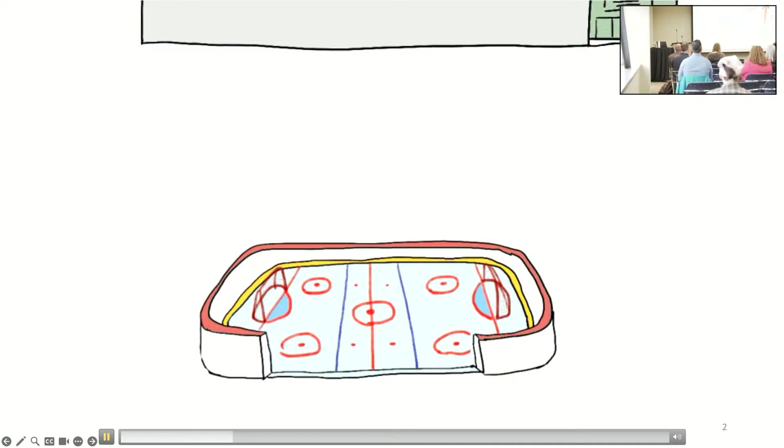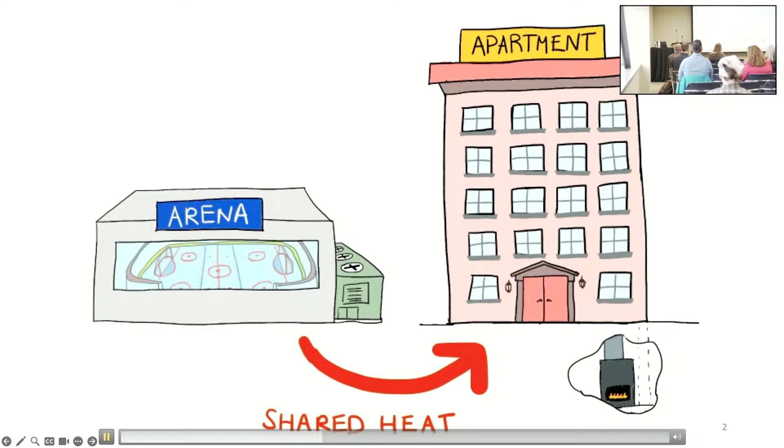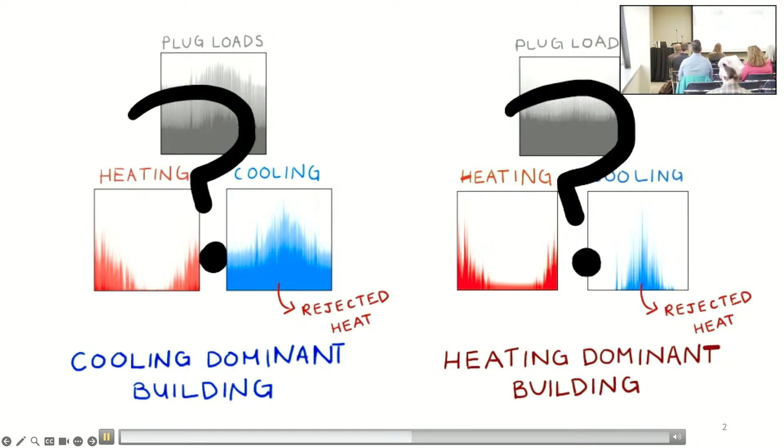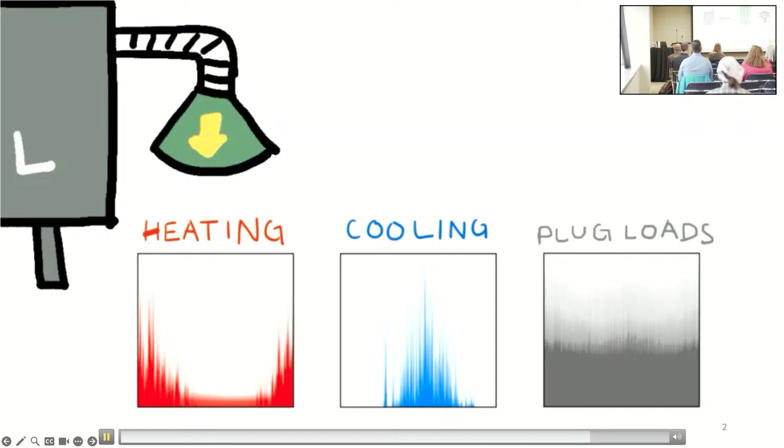Buildings contribute to a significant amount of Canada's greenhouse gas emissions. This comes from the energy used to power appliances and lights, cool buildings in the summer, and heat them in the winter. Some buildings with high cooling loads will reject heat to the surroundings throughout the entire year. What if this rejected heat could instead be shared with a building that needs it, reducing the total amount of fuel consumed? This can be accomplished using a thermal energy network. In order to design these networks, we have to know how much energy is required and rejected by each building. This is the focus of my research. My name is Stacy and my work uses measured utility data to train a predictive building energy model. I look at how different factors like weather impact energy demand and use them to predict the thermal and baseload profiles for each building. This helps to control the system to distribute energy efficiently while minimizing carbon emissions.

So I don't know how I have to do anything after this. Stacy basically defined the problem: we have carbon in our buildings. She won the GradFlix Award for this contribution, and she didn't even explain what she was talking about whatsoever. She didn't use the big words.

If you look at where our energy comes from for our buildings, okay, we have our appliances, we have our lights, we have our space cooling, and then we have all this orange stuff. That's how we heat our homes and our hot water. And then if we come back, okay, this is about greenhouse gas emissions and carbon emissions savings. Where does the carbon come from? How we heat our homes. And about 6% in this province comes from our electrical grid, thanks to our very green electrical grid: nuclear, hydroelectric, and a lot of wind.

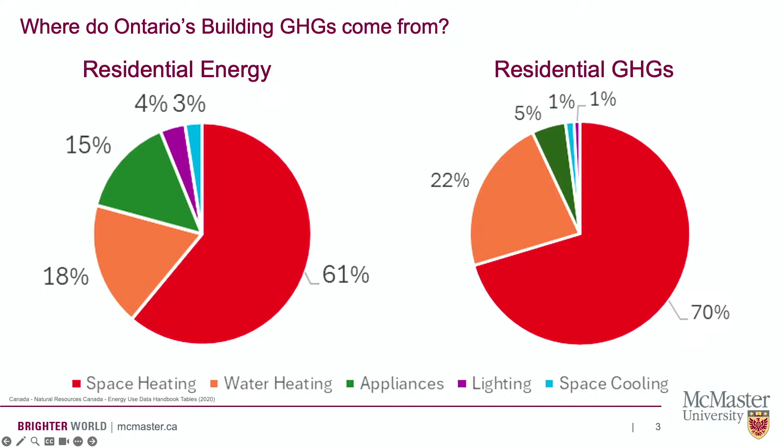So what should we focus our efforts on? Heating, right? So where does our heat come from? How do we heat our homes? Well, most of our homes are heated by natural gas. Most of you, probably almost all of you, have a natural gas furnace. Maybe some of you have a heat pump, right? We have about, what, 3%? It's growing. And if you're in a northern community, you're probably on fuel, diesel fuel, propane, or even wood.

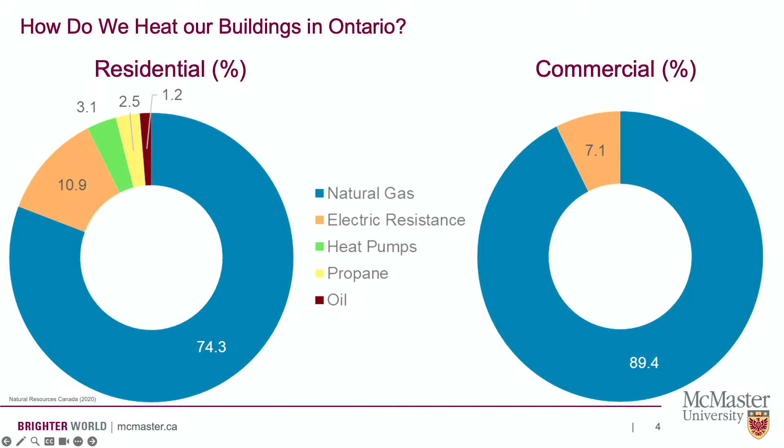Commercial, it's almost all, 90% is gas. So we have to tackle this problem. This is a huge problem. Why is it a huge problem? Well, guess what? We live in a cold climate. This is Toronto. Here's Edmonton, it's a little bit colder. We're on par with Sweden.

So this is indicative of how much energy we need to heat our building. This is indicative of how much energy we need to cool our building right here. The difference is tenfold. We have a problem, and it's tenfold what our cooling problem is. And if you know anything about our electricity grid, our peak right now is because of cooling. Could you imagine tenfold on top of that to do the heating side?

And it's worse than that, because when we're cooling, we're only trying to take heat out of our building between a 12-degree temperature difference. Say it's 35 degrees Celsius outside, you warm up your house, or you cool down your house to 23, you increase your set point a little bit because you're a good citizen.

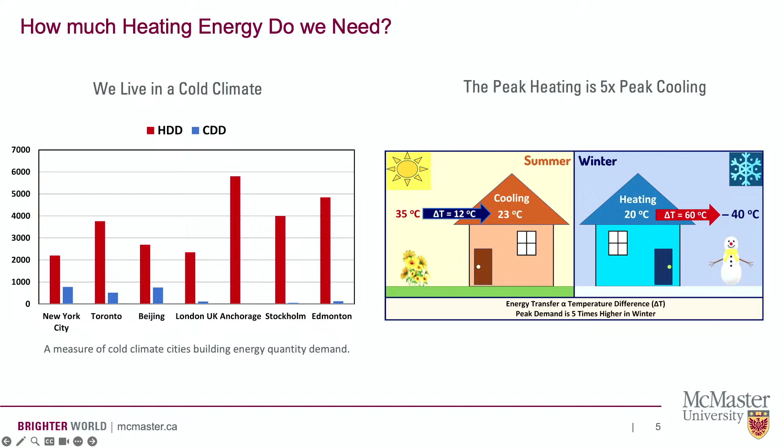But in the wintertime, when it's between minus 30 and minus 40, you still want 20, so you set it back a little bit. Now the temperature difference is 60, that's 5 times. So that peak energy demand is 5 times higher. It's a significant challenge.

So I'm going to talk about stuff. I presented this to my sustainable energy course yesterday and to my thermodynamics 101 course, and asked for their feedback. It was the last class, so I thought, let's have some fun. And they said, well, you better explain what a joule is, because when I came in here, I didn't know what a joule was.

So a joule is a measure of energy. So is a kilowatt hour, and watts are power. They're different. And then you get into prefixes.

So kilowatt hours is what you see on your electricity bill. You're probably between 500 and 1,000. Well, a pizza oven uses about 300 a day, just to give you context, enough to heat 6 homes. McMaster uses 10 megawatts of power at peak, typically. The scale of our entire electricity grid at peak, say September 1st last year, was 23 gigawatts, 10 to the 9.

We get into terawatts when we're talking about how we heat this city. And this city is a little bit bigger, probably more than 1 terawatt, probably 4 or 5 terawatts. And then we're getting into 10 to the 15, so petajoules, when we talk about the province. So I'm going to use all these words, and I'll use thermal energy and electrical energy because they're a little bit different.

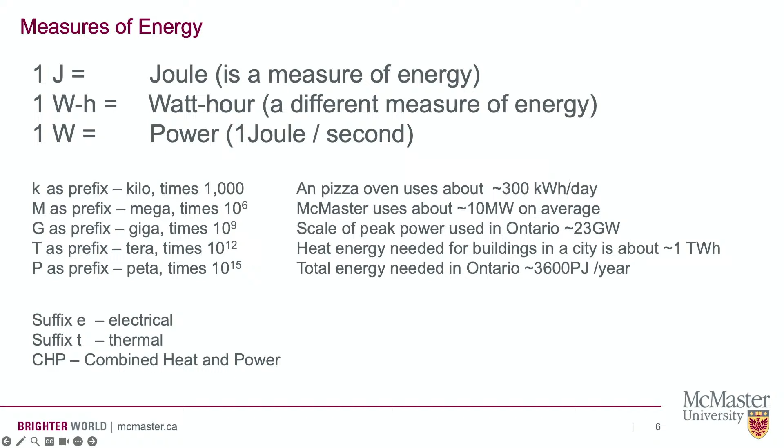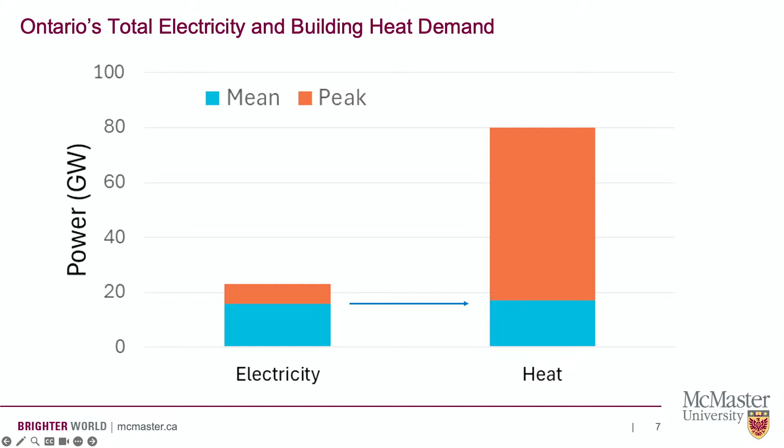So how do we deal with that? Well, our electrical grid's very clean, we should electrify that, right? We can do that with baseboard heaters like they do in Quebec. If you've ever been to Quebec, very uncomfortable. Let's not do that, that's bad.

We'll use heat pumps instead. What is a heat pump? A heat pump is an electrical device, exactly the same as your refrigerator, that takes heat from a cold space and puts it into a warm space. So it takes it from outside and warms your house, or takes it from the ground and warms your house. You can even take it from things like sewers or wastewater and use that heat to heat your house.

The efficiency is what's really good about it. If you look at an air source heat pump, it's about 200% efficient - that's not quite the right word, but I'll use it for now - 200% efficient on average, seasonal average. That means I need half a kilowatt of electricity, and I get half a kilowatt from the air, and it delivers 1 kilowatt of thermal energy to my house. If I used the ground, it would be higher. And if I used heat recovery heat pumps, it would be even higher - we're talking 800%.

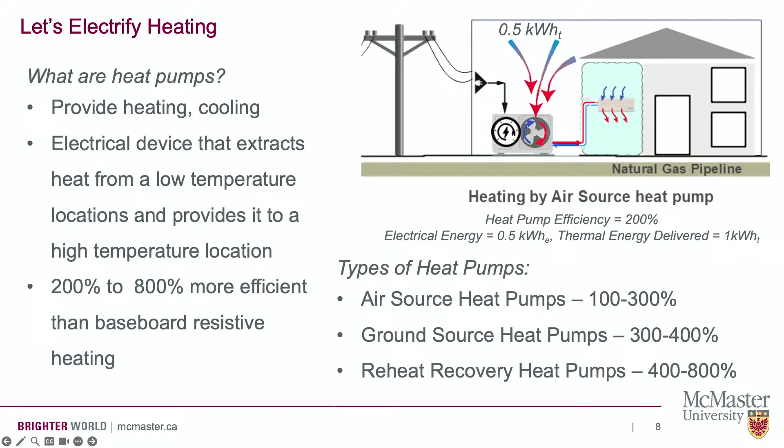So we have this technology at our disposal that we can use to electrify heating. Now, that means we have to look at where our electricity comes from. So here is our nuclear fleet - we have CANDU. 50% of our electricity comes from our nuclear fleet, and we are doubling that right now. That is already planned.

Hydroelectric - Sir Adam Beck, thank you very much. The green stuff is wind, which we have about 5 gigawatts, that's a lot of wind energy. And then the remainder, the blue stuff - oh, there is some sun, but I'll talk about sun in a second. There is some sun, not very much, most of it is at the distribution level, so there's about 2 gigawatts of sun. But this energy here is called the marginal energy - that's our gas. So when we don't have enough, we use gas.

Now, here's something interesting. I like this because I picked this up on the 9th, the day after the eclipse. I was out there on top of Hatch watching the eclipse, it was fantastic, and I got that picture right there myself, so I'm very proud of that. And then I went, okay, what happened to the electrical grid? Because I'm such a nerd. And that's what happened - see right there? That's the eclipse. So we have all of this solar energy that's behind the meter, that people have on their homes, that sort of offsets their demand, and it all went away.

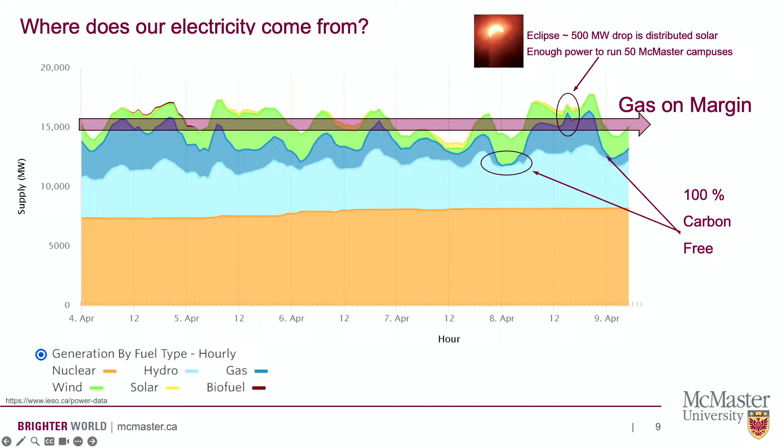Wind stops blowing. The problem is right now we are at a time where we are refurbishing our nuclear fleet, so our nuclear fleet is a little bit lower than it is, and we're refurbishing more. So more and more gas is going on the grid, and right now, most of the time, 60% of the time, gas is on the grid.

And I showed you, it's even higher. So I think their predictions are off. It was almost only 5 hours of a week that gas was not on the grid.

So if you think about where does your next joule come from? Well, guess what? It comes from gas. Your next joule comes from gas. That's a problem, and it's only getting worse.

And this is from the IESO. It's because it takes a long time to build a nuclear power plant. That's our main strategy right now to decarbonize. It's because we have to fix a lot of nuclear power plants, or refurbish them — not really fixing, they're extending their life. And in the meantime, our government has decided to rely on our gas fleet.

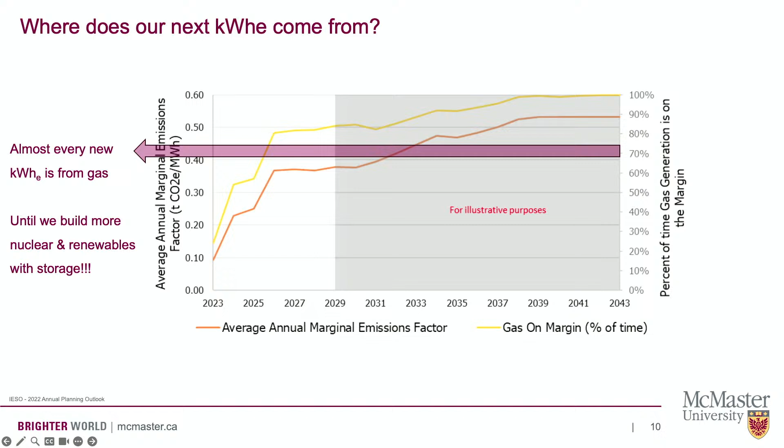So what does that mean? Well right now, most of our homes — 74.5% — are heated by natural gas. I'll be nice and say they're 90% efficient. That means for my 1 kilowatt hour of heat, I need 1.1 kilowatt hours of natural gas.

And I generate 204 grams of carbon. Now, I decide tomorrow I'm going to switch to an air source heat pump. And when I switch to my air source heat pump, I have 200% efficiency, but because I'm switching now in this environment, I have a challenge.

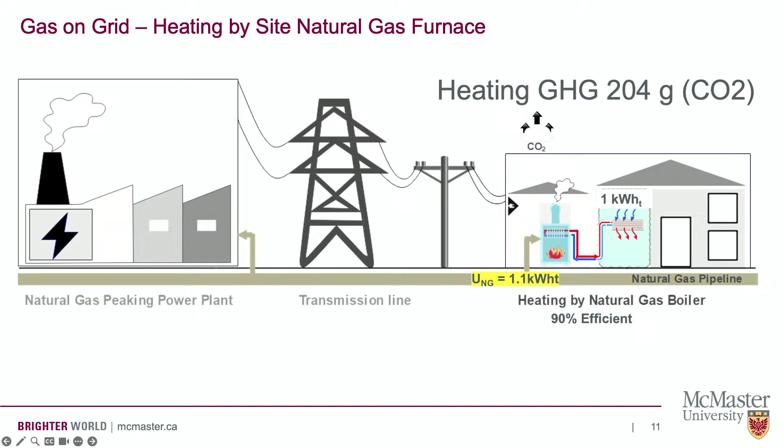I'm getting it from a gas plant, right? Because I said the next joule is from a gas plant, and my gas plants are 42% efficient. I'm not going to get into it — that's thermal 101. That means 42% goes to electricity and 58% goes up the chimney. I like that number because I'm going to try to capture it later on, but only 42%.

Then we're a big country and a lot of it is all over the place, and no one wants a nuclear power or gas power plant near them, so it's far away. So we have a lot of line losses — 10% if you include distribution. So in order to heat my building and get that 1 kilowatt hour of heat, I need half a kilowatt of electricity.

With all of these losses, I need 1.3 kilowatts of gas, and my carbon emissions went up 17%.

Okay, the good thing is I'm using this as an example. We need 240% efficient heat pumps, so buy the good one. 300% — that balances us, brings us to the other side. So we really have to figure out and make sure if we're selling heat pumps, we're selling the good ones.

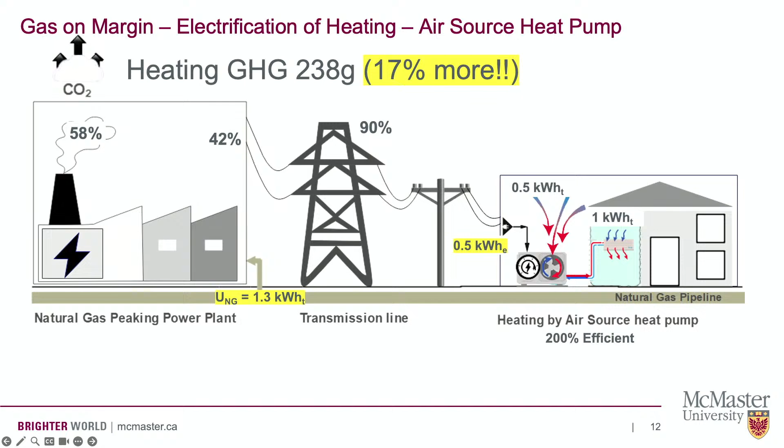That's not really the problem. We still have to electrify. We have to electrify, okay.

That's the challenge. How do we deal with that challenge? Come on in, guys. No, come on in. That's okay, they're all my guys.

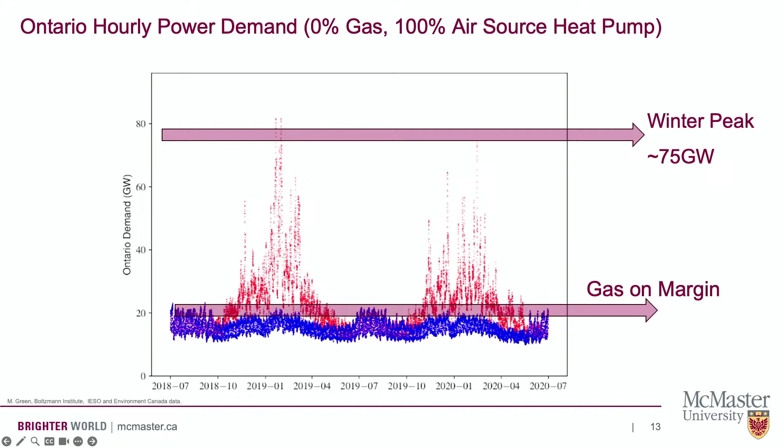So let's go a little bit narrower. I've been involved with Lynn for, I don't know, a long time.

This was work done before the other project. I still love this presentation because this is Burlington, my hometown. I'm on the community energy plan, now climate action plan. And we had this fortune to visit Sweden, and we saw how they were doing it sustainably.

We came back and some people asked me, can you see what would happen if we followed Sweden's approach and electrified everything? So we said, okay, sure. All my students spent three weeks, dropped everything, all their research, and said, let's do it.

We got the data for electricity, transportation fuel, and natural gas. What we found is 26% is electricity, 29% is transportation, and 44% of the energy is from natural gas to heat our homes.

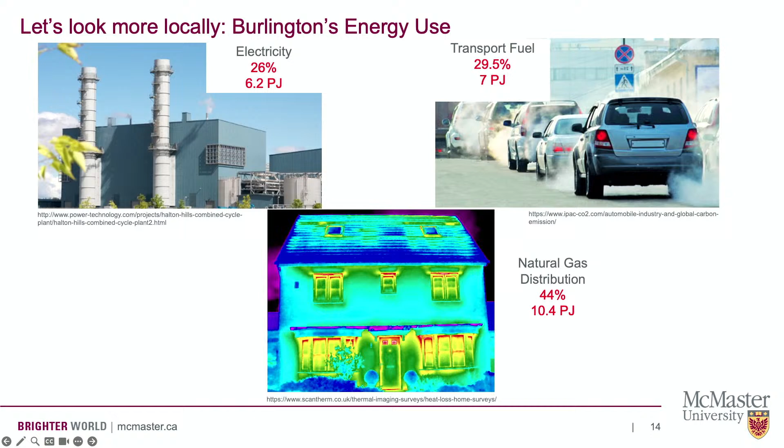That's interesting, but the carbon was more interesting. 50% of carbon comes from heating our homes. So what should we be tackling? What should we really focus our research efforts on?

Of course, our efforts at McMaster on electrification of vehicles, Dr. Ali Emadi and Dr. Habibi and the entire team there, that's brilliant. It has to happen. They're 10 years ahead of where we need to be on the heating systems. So it's a big challenge.

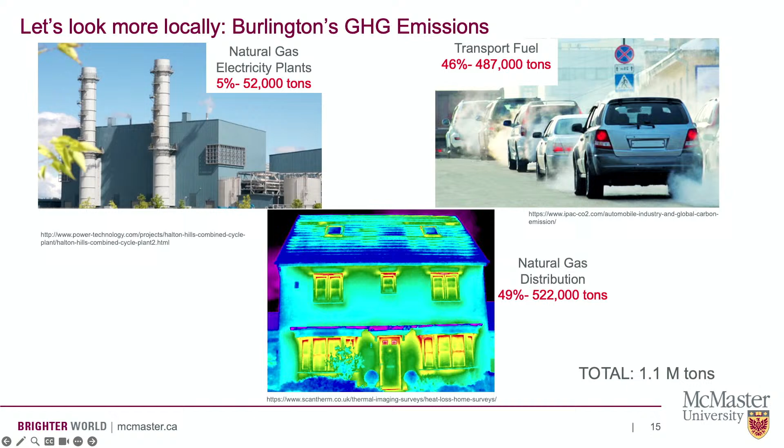If we look at what happens when we electrify things, looking at totals in petajoules, which is how much we use in a whole year, and this is just changing it tomorrow with a magic wand, all electricity - electric vehicles are way more efficient, going from 7 to 2.6, and air source heat pumps go down from 10 to 4.2.

That's great, so we've made a bunch of efficiency improvements. That does increase our electricity delivery by Burlington Hydro by 2-fold.

Now I'm not doing this instantaneously. We'd do this over a 25-year period. In 25 years, the population is going to grow by 50%, so that's a 3-fold increase in electricity that we're going to deliver.

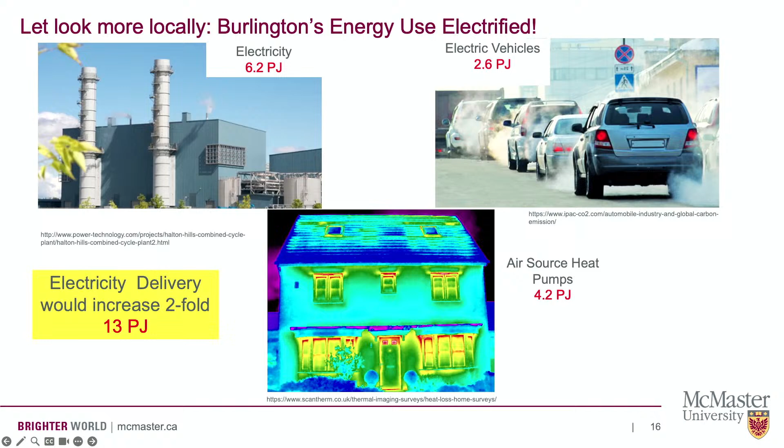And that's for everybody. It took us 150 years to get to here with our nuclear, hydroelectric, wind, and gas. Now we have to go 3 times that - 3 times more nuclear power plants, 3 times more Niagara Falls, which are hard to find, 3 times more wind, 3 times more solar. This is a big problem, a grand challenge.

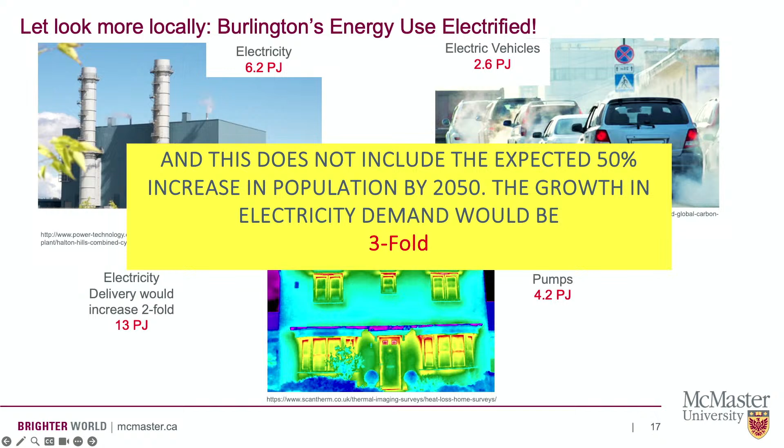Of course you've got to look at everything. I'm not going to get into conservation in depth, but we did look at it. This chart is someone else's - it just looks cooler than ours.

If you look at it, you start with the cheapest and go forward. These are called deep retrofits: insulation, changing to the best appliances, making sure there's no leaks, and getting rid of old, crappy appliances and heating systems.

We need to do that over 25 years. That'll happen - we should be doing a little bit more than that, but this is what we need to do.

So when we looked at the best-in-class transition from where we are today to where we could be, based on all the technology we could dig up in our research, and best-in-class conservation, this is what happened - it went up.

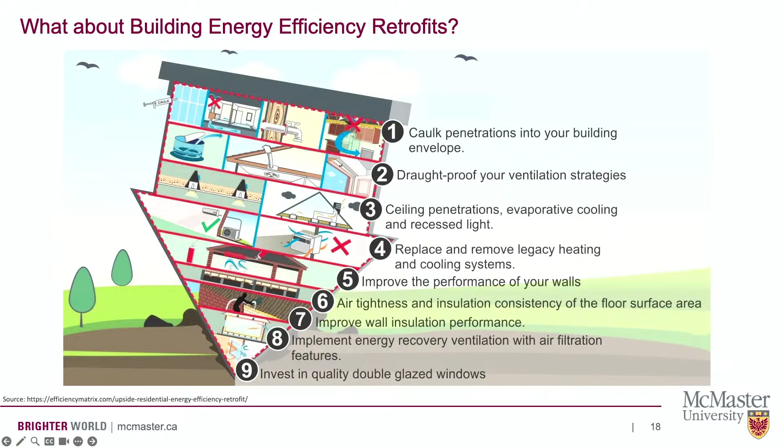That population growth is a problem. So it only went up 9%, and greenhouse gas emissions only went... so we have to do something other than conserve.

We have to start thinking about fuel switching. We have to get off gas, get onto electric, or switch to electric vehicles. We have to figure out how to do that.

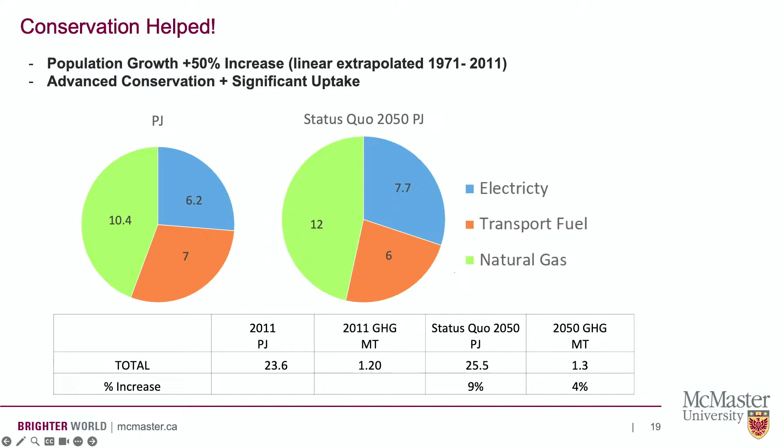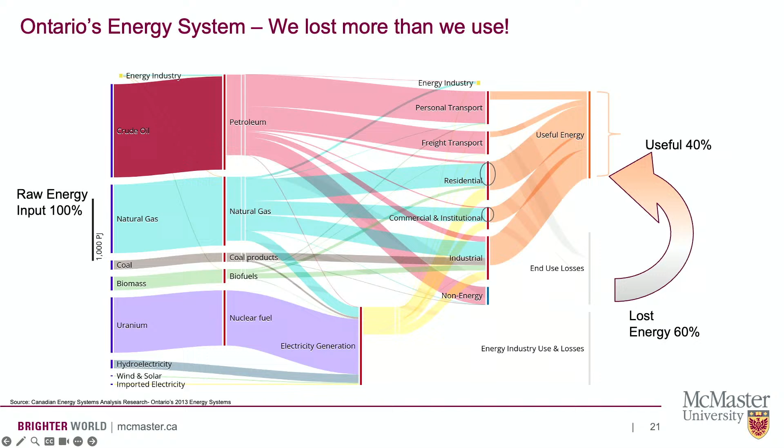What if we monetize that value? Like Stacy talked about, if you had an arena, they'd have a revenue stream for heating the pool next door, right? That's what has to happen.

So if we look at this, if we take climate action, we really think about what we need to do. If you include industry, our building sector is only 24%, but that's a lot of our carbon emissions. We dump 60%, and we put so much renewables online without proper storage that we actually curtail.

Curtail means we spill more water over Niagara Falls. We stop the turbine blades from spinning. We unplug the solar panels, and we even bypass heat around our nuclear fleet and dump that heat directly into our lakes.

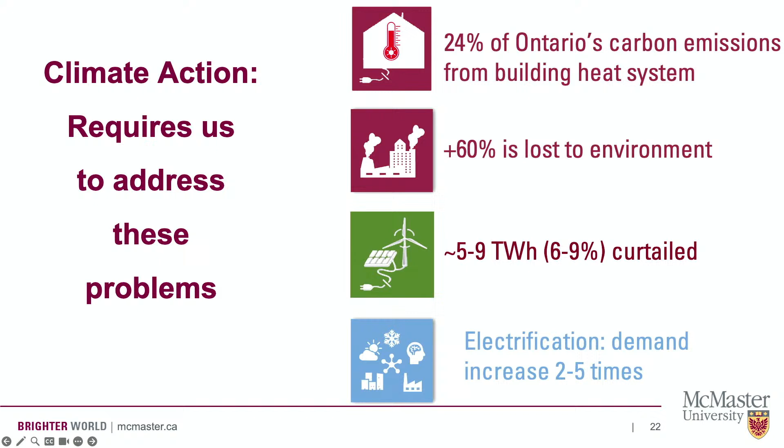That's 6 to 9% of all the energy we use that's not harnessed. And as we electrify, we're looking at 2 to 5 times more demand, depending on how we do it. We're planning for 2, but in reality it's going to be more.

So how do we deal with this? What's the solution? Well, thermal networks—I'm going to get into this. That was actually the title of my presentation before we changed it, so now I know what I'm talking about.

Then harvesting and sharing energy. No one shares, but we live in a shared economy, right? If you use Uber or Airbnb—so the word is nice.

You still make money. And then we need distributed energy resources. We need resources in our community—combined heat and power systems, more solar collectors, way more solar collectors in our communities. We need to create demands.

Guess what I can do with a heat pump? Create a demand. And we need to integrate our networks. That diagram, that spaghetti, is called a Sankey diagram—they're all independent streams. You go to the gas station and buy gas, you pay Enbridge for natural gas to heat your home, and you get electricity from your utility. What if we had an integrated supplier of energy that optimized all three?

That's the future. So how much do we have?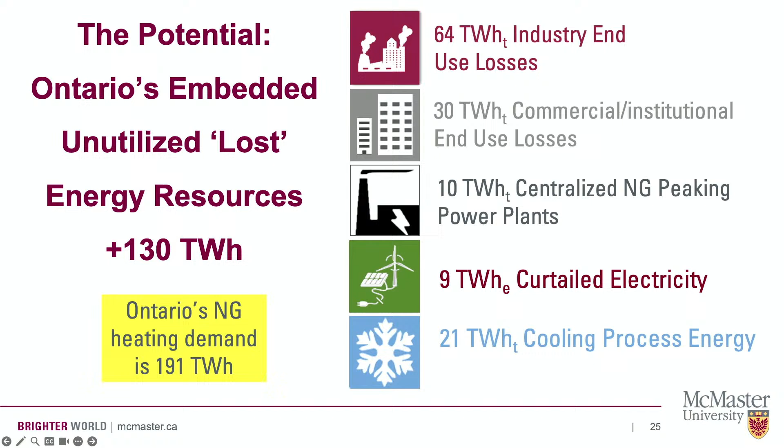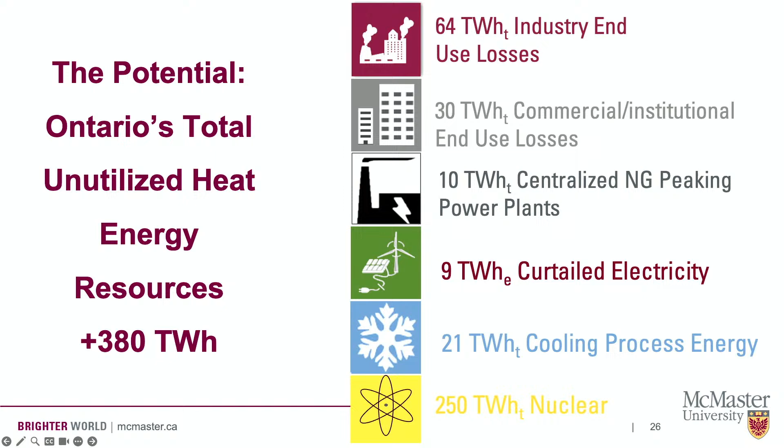I started working with Dave Novak, and with Bob Walker and CNA, and we look at there's a lot of heat. There's more opportunity in heat if we go to very small modular reactors, or if we take the heat from our own reactor at McMaster University, which most people don't even remember we have—5 megawatts—or if we tap into new reactors becoming combined heat and power nuclear reactors like they have elsewhere in the world. We're not talking about something that's never been done. We're talking about the opportunity.

So here's something I like talking about—I've been doing this a lot. This is my pizza restaurant example, just to bring it home and bring it local again. A pizza restaurant has probably the highest energy use per square foot of everybody in our community.

Just to give you an idea, it uses so much energy it could heat 6 homes just by the energy it's dumping up the chimney. Then it brings in other utilities to heat its hot water, do its dishwashing, and heat the air because it's sucking up so much air—like your own vent hood at home. Sometimes it's hard to open the door at a pizza restaurant because they're sucking so much air out that they have to pump it back in and warm it up.

So what if we could harvest that heat right off the appliance, integrate a thermal storage device, and heat their hot water? That would work—guess what, we did it. We got $1.5 million, now $1.7 million, in research funding to develop this technology and patented it. Jeff over here changed the regulatory standards to allow us to do that—it's going to be changed this month, Jeff. Pretty good timing.

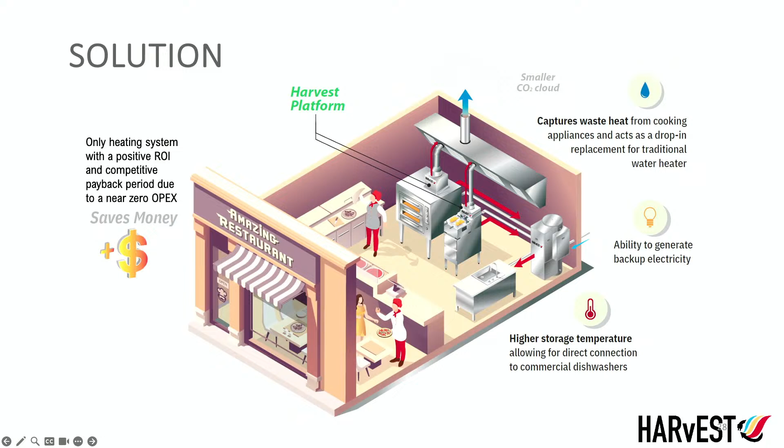And we're able to recover heat and then heat hot water. But what we're doing with a pizza restaurant or McDonald's is even worse, is all we're doing is really heating their hot water for dishes and their dishwashing system.

At Wings Up, we're working at their makeup air system. But for a fast food restaurant, they have so much heat. I said 6 homes worth, and we're only using 1 to 2 of them.

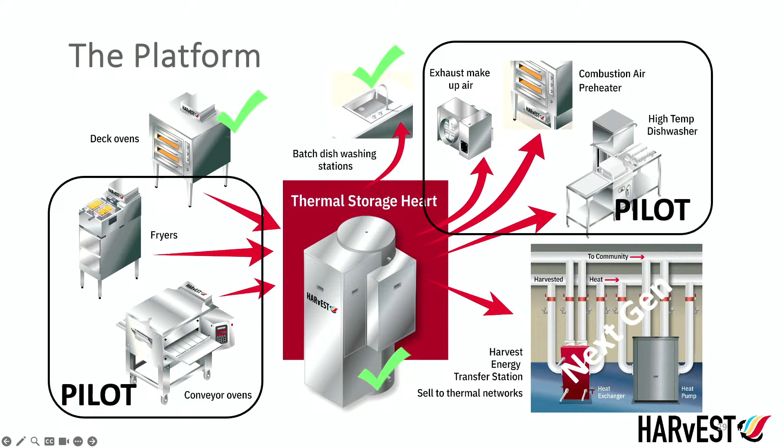So what if I could export that heat? What if I could sell that to a thermal network? Guess what? You could make money, just using it internally, okay?

Using that energy on site instead of a conventional gas or electric, they'll save net $30,000. ROI is 18%, that's really good. 3-year payback period, pretty good. They want a little bit lower, I'm working on it. But a full service restaurant is better because they use a lot more water.

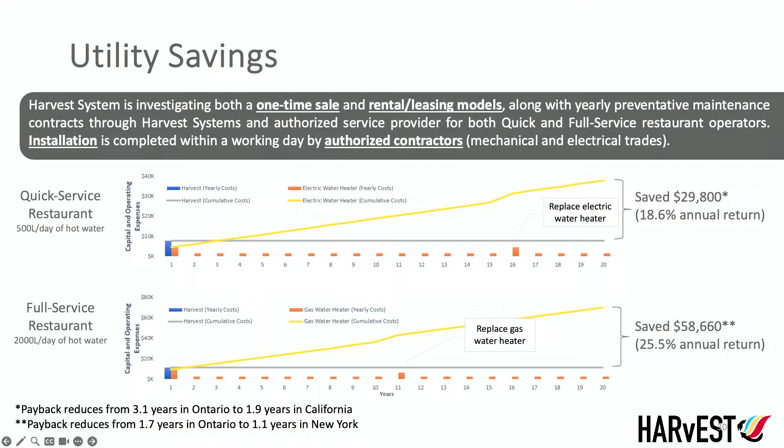Now imagine if we could use all of those. We're talking hundreds of thousands of dollars in additional revenue, depending on the type of restaurants. So guess what? All that heat I was talking about has value. And you can commoditize it. You can monetize it, and you can make money on it too, because it's a $5 billion industry.

That industry is just the restaurant industry. If you sold appliances that can recover heat from all the restaurants in North America, that's the scale of the industry. So it's huge. So other people can make a lot of money.

So if you have your restaurant, what do you do with it? Well, you need a network. We call it a thermal network. It's just like your electrical network, analogous exactly. But what we do, we have pipes in the ground and they pipe warm water around.

So the arena is dumping heat, so I could put it in here too. The pool needs it, oh we'll sell it. We'll have micro financial transactions, peer-to-peer transactions. Anybody used Uber or blockchain? That's what you do, it's peer-to-peer, right?

But you need a management system. So somewhere in your community, you're going to need a few management systems, and this is the scale of it. Maybe it has a combined heat and power system, it has thermal storage in it, maybe it has long-term seasonal storage in it. It has some renewables, PVs, and integrate that

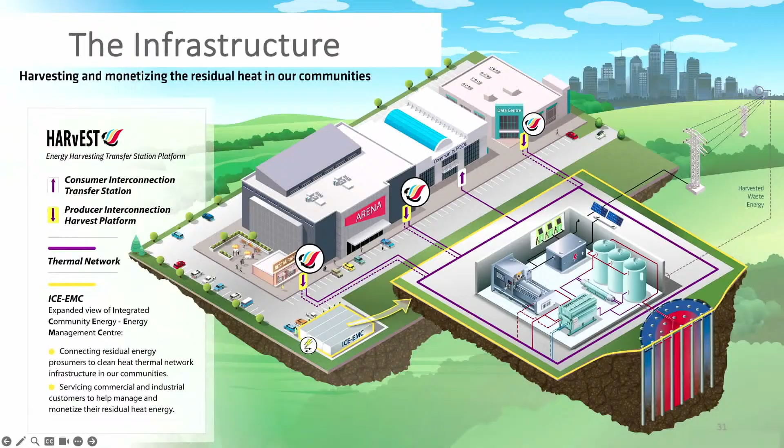with bidirectional vehicles. Guess what? We built it. We built it at Hatch. It's a $5.5 million research facility. Everything I just said is built into that, including a 7-story deep thermal storage system. So it goes down 7 stories. There's 66 boreholes underneath this half of this building.

We heat that up to 60 degrees Celsius, and that's from waste heat from an engine. It's a very small engine, it's a Toyota Corolla engine, literally. But I'm capturing the waste heat, and I'm using that waste heat not only to power that building during peak times, only during peak times, offsetting gas on grid, never when there's no gas on grid. So I go from 42%, remember that number a little while ago, 42%, to 80 to 90% efficient.

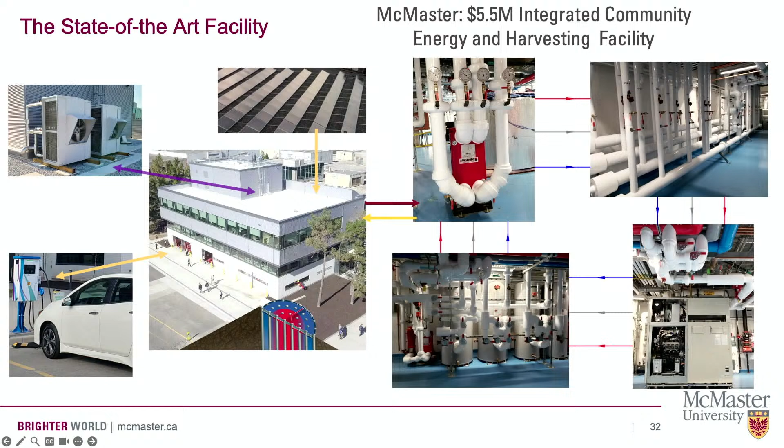I halved carbon emissions. Okay, someone's gonna get mad at me because I put gas at McMaster University, right? I'm gonna get in trouble. And there's more gas coming from McMaster University. But the atmosphere does not care if it came from McMaster University or if it came from Halton Hills Power Plant. I halve the carbon emissions into the atmosphere. That's what we have to start focusing on, is the system level understanding of carbon emissions reductions.

We found over 1,000 sites that we could put these type of systems in. So, and really there's 3 sizes because I came from the automotive industry. What size do you want? 0.5 megawatt, 1 megawatt, or 2 megawatts? What color of car would you like? Black, black, or black? Model T Ford. That's exactly it. Okay, and we had a good reduction in carbon emissions.

So just harvesting alone, almost halved it, adding a CHP and running that locally, as opposed to getting that energy from offsite, goes down with storage to 600 and all the way down to 0. When we switch that out with a bio CHP, or maybe an MMR in the future, a micro modular reactor, or very small reactor, right?

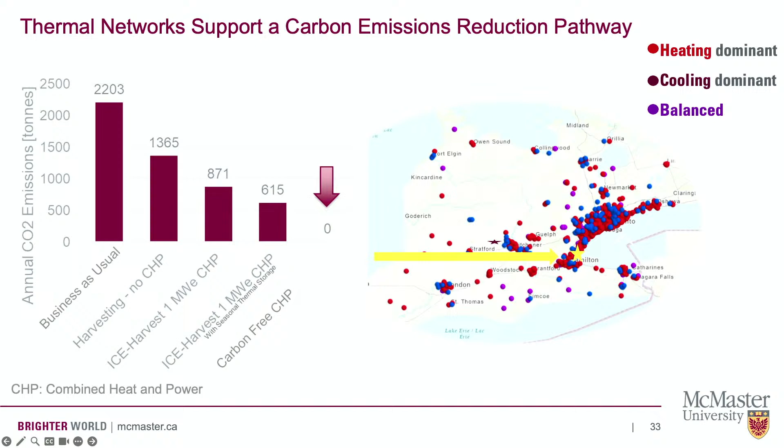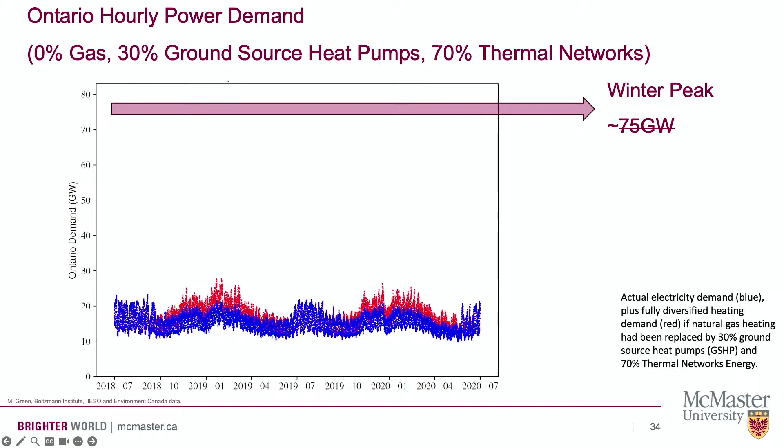We have that opportunity, it could be hydrogen. And when you do that across the entire province, remember that 75, that's gone. It's down to here because we're using the resources in our community, right? We need new infrastructure to do that. So what does that look like? It's called a thermal network. So you have pipes in the ground.

You have your prosumers, your arenas, your grocery stores, you have your energy management center, and you integrate that with thermal storage. Okay, so all it is, is buried pipes. We already have sewage systems. We have water delivered to our house. Why can't we have hot water? Right? So it exists. It's not new.

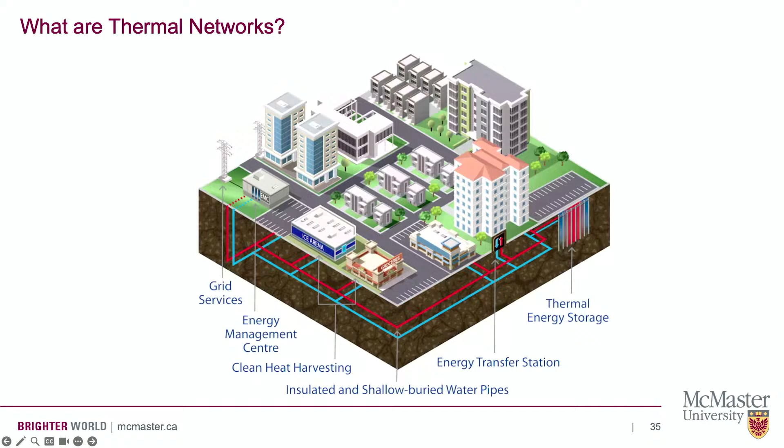In fact, there's a nuclear power plant heating homes as far as 100 kilometers away with waste heat, and it's been in operation for 40 years. We're just not doing it. We have Enwave, who does heating and cooling, and now they have the Well, this big thermal storage tank in their community. So it's not like it's not been done. It's possible. We're just not doing it because we have cheap gas.

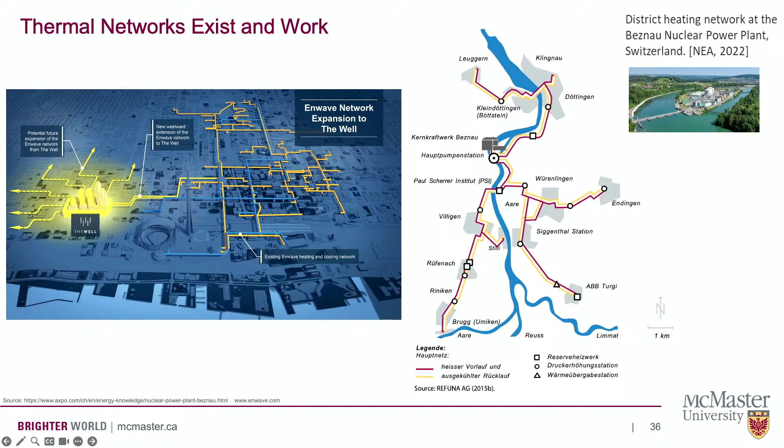Okay, so what is it? It's pipes in the ground. They look like sewage pipes. They can be insulated, they don't have to be. They can be flexible and bendable. We've got directional drilling thanks to shale gas, right? So we have these networks. We can build these networks. We expand on these networks.

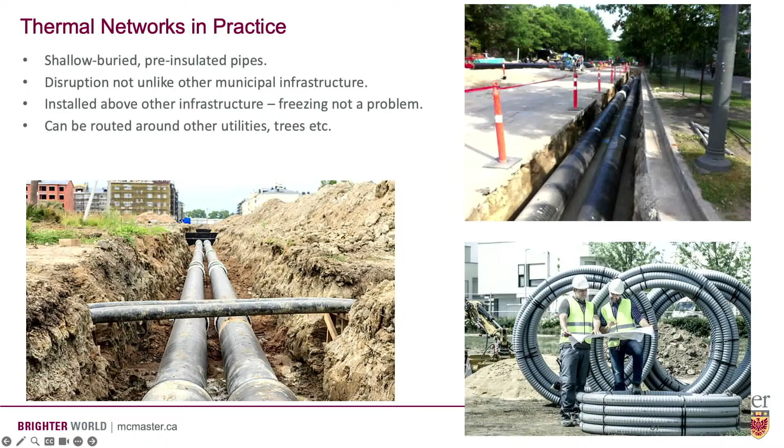What else does it involve? Well, at your home, instead of having a big furnace with gas that burns, that leaks, you need a carbon monoxide tester, you have a heat exchanger. So it's probably a water-to-water heat exchanger, and that's about this high. I'm short, so it's about that high. All right, or you have a heat exchanger and a heat pump. Now, this is a waste energy recovery heat pump, so I get the 800% benefit, not the 200% benefit.

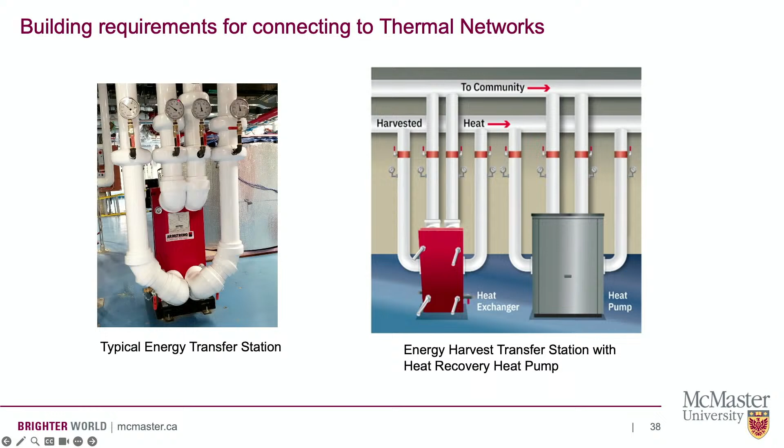And then I need storage, and there's a bunch of storage. This is something we're just getting into right now. It's really fascinating. So obviously, there's the tank storage. We have that. I talked about the geostorage. I'll get into that a little bit more.

But we can also use pit. So imagine an old quarry that is not used anymore. Or imagine an aquifer, which we actually have a lot of, a saline aquifer trapped down deep in the earth. We can heat that up. They do that in Europe all the time.

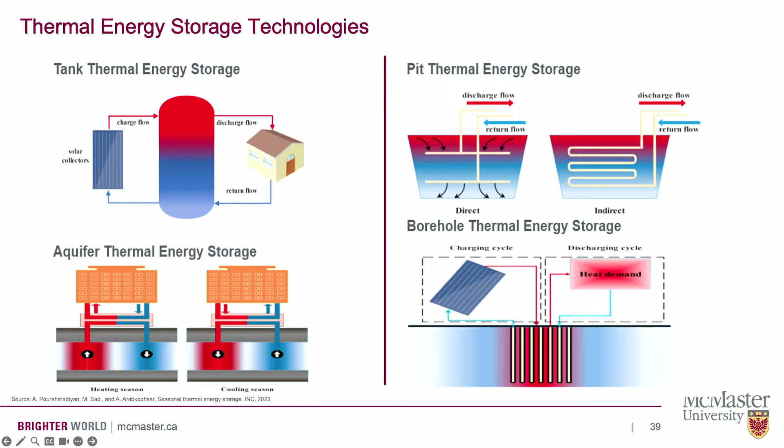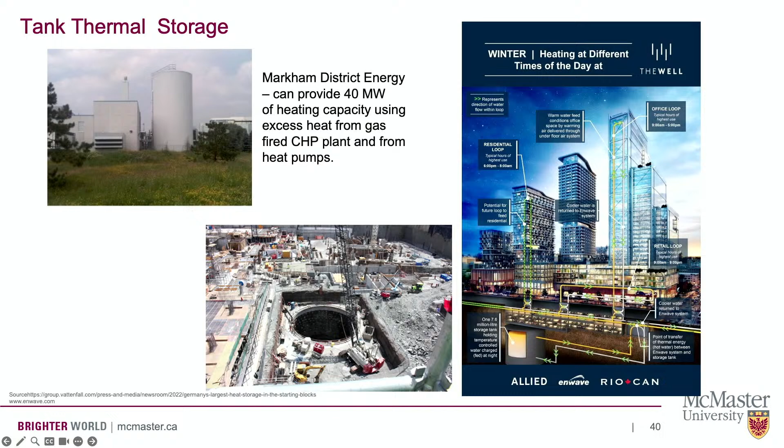So look at the Well. This is this new construction in the heart of Toronto, right? We have Markham District Energy. Guelph has one too, where they store big tanks of water. That's all it is, just like your hot water heater, all integrated. So we have the tank storage. We have what we just found, my friend Bill Wong, who is retired from NRC.

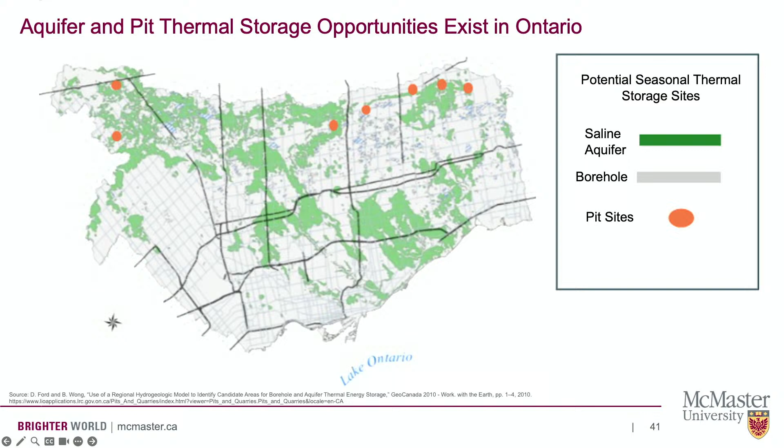So now we're trying to figure out where should we put these? How many do we need? How much can we store? Because there's waste heat all summer long. And then there's the ground source.

This is Chantel's work. So you might have heard Okotoks before. We sort of used them. They were about 50% efficient, meaning they lost some heat to the surroundings. Chantel's improved that to 70% efficient round trip efficiency, that's underneath of this building. So she's validated computational models, which this is a model heating up and cooling down over the seasons.

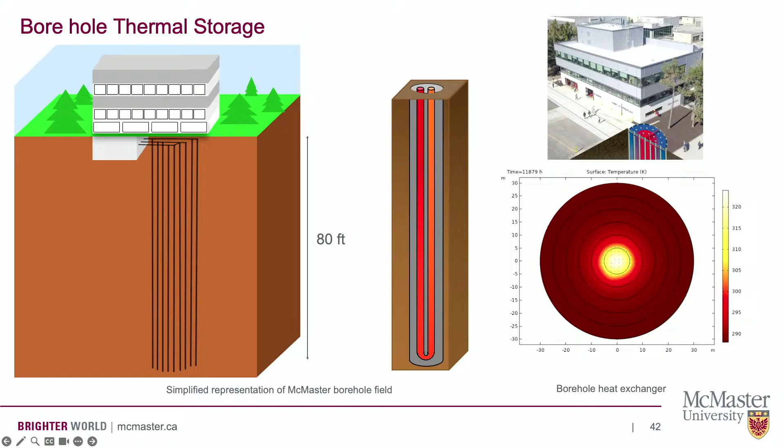We heat it up all summer long, when there's lots of waste heat, no one needs it. It cools down when you take it out of the ground and heat the building. And then we have to figure out where all of these resources are happening.

And we just got a grant, thanks to NSERC, to do this. So we got 2 grants. One is to map out all of these resources, just like you have a wind map, right? Or you have a resource map for the oil and gas industry, or you have a resource map for solar energy. We don't have a map for heat in our community that we could use.

So we're gonna do the demand, figure that out. We're gonna figure out the roofs, how much we can get, figure out from geothermal, and then what are the other supermarkets, power plants, things like that. Even if we did waste incineration. Then we're gonna do these little things, load profiles. And we're going to use what Stacy didn't talk about, machine learning, deep learning, and AI to predict what's going to happen in the future as our population grows and as we improve our efficiencies and transition over to do that.

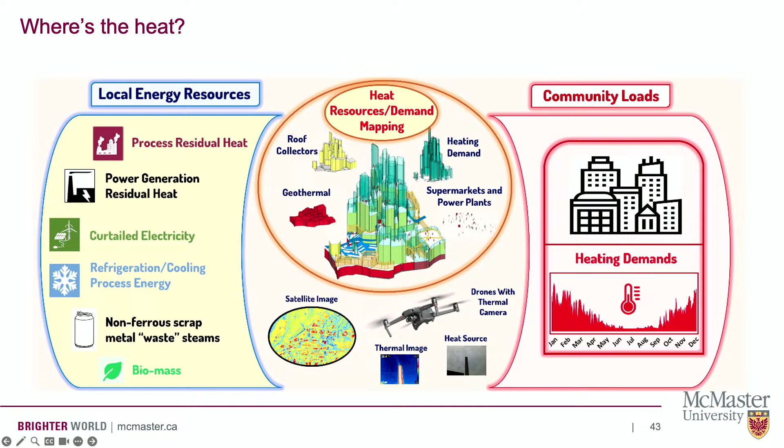So, and then there's the nuclear. Why wouldn't you include nuclear? It's just this huge opportunity where you can either have a thermal corridor, pipe it 100 kilometers from a plant somewhere that's a little bit further away, to say a place like Toronto that has an Enwave system.

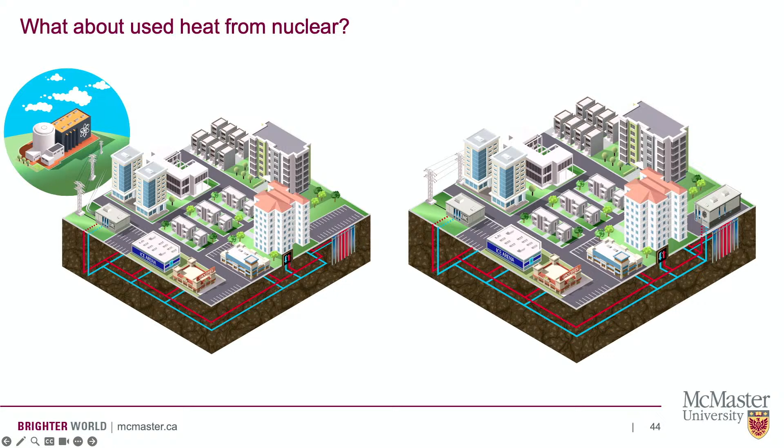Why wouldn't you do that? We've done it before. What if we had an MMR right in our own campus? A very small reactor on our own campus. Well, we do, by the way - 5 megawatts. We just can't use it because our system doesn't cooperate. It's too hot. We've already done it.

So this is the pipeline infrastructure for natural gas. These are all the sources, those little things I talked about. They come all the way across the country in a big pipe, and then they're distributed to 74% of the homes. That started in the 50s, and we did most of it by the 80s - 30 years. Guess what? We need 30 years to do that again, but with water. It should be easier.

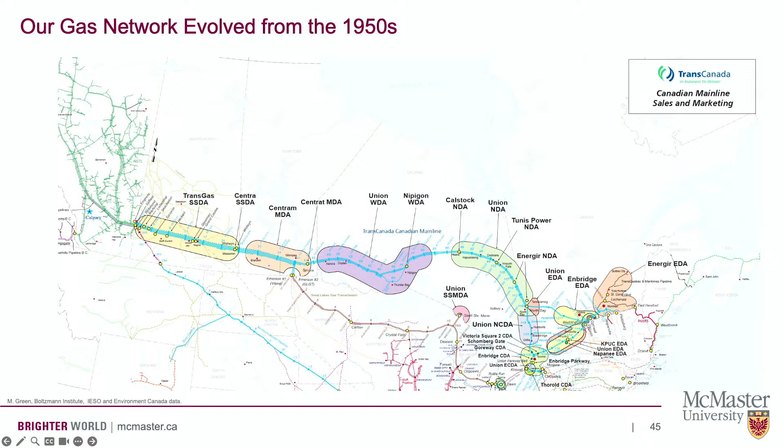So what are the key recommendations? First, we really need to launch a public education and consultation plan around this concept of this new infrastructure. Step number one is today. We've actually done this a couple times at the Canadian Nuclear Association as well with our team.

We have to understand that residual heat, waste heat as we used to call it, is a valuable commodity. It's worth money most of the time. So if we have that and we need infrastructure, we need to build this next generation of infrastructure for social good. You want to stop climate change, you have to invest in infrastructure. You don't try to incentivize the individual who can't afford it to do it - you provide them with infrastructure to make it cheaper and affordable for them.

We need a utility approach. It has to be a regulated utility, with integrated governance between gas, electric, and thermal. I'm not saying gas is going to completely go away - we have an infrastructure. What if that was hydrogen? What if it was RNG? What if it was different types of e-fuels? We could integrate that into our existing infrastructure and help us with some of those peaks.

And then finally, the opportunity for nuclear is too good to not think about, to not plan for. We need to develop the business cases for them. We have to work out the details, and that's why we need the regulated approach to solving this problem.

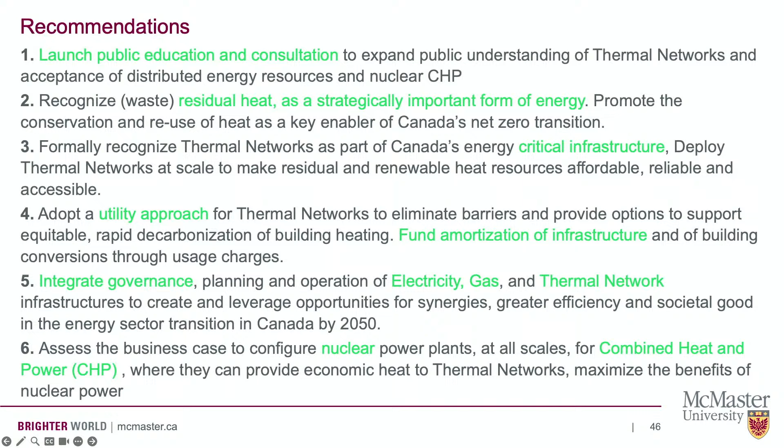So key takeaways: we need to conserve. Our buildings have to change - we need low temperature heated buildings, just like the Hatch building and the geoexchange system, the greenhouse. We need to modernize and expand thermal networks. That has to grow, and then we have to start incorporating residual heat into these networks.

We can even do it now. We can do it - we're talking about doing it for malls. How many restaurants are in a mall? Why don't we heat the whole mall? Guess what, that's a thermal network. And finally, this has already existed - it's a practical solution for Canada. If you want to look at our position paper, that's our QR code that we just launched last month on this topic.

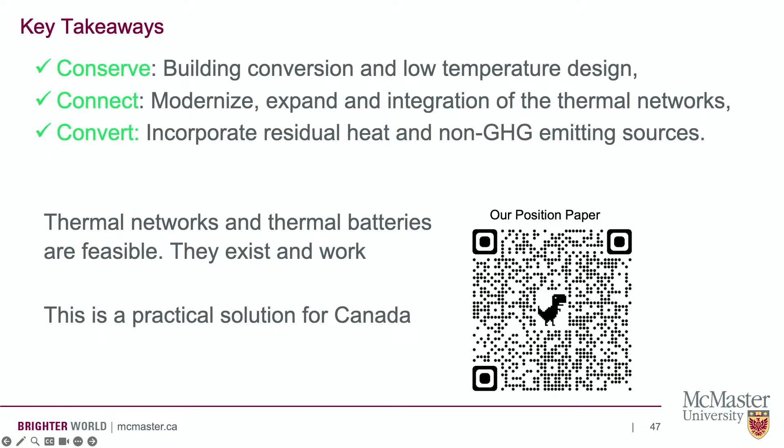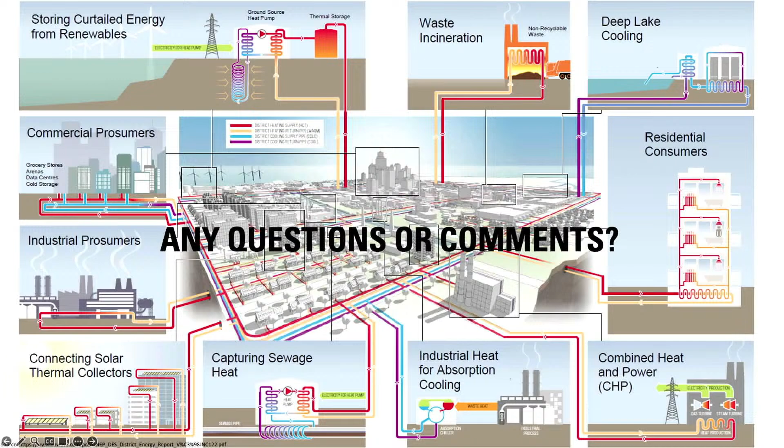Thank you very much. I'll open to the questions. Feel free to ask any questions. Yes, sir - what is a low temperature?

So it would be like geothermal in your house. Jim, just repeat the question. Oh, okay, sorry - it's recorded. What is a low temperature design for a building? Was the question, right? It is exactly what you would do if you were to use an air source heat pump or a geothermal storage system.

The best would be in-floor heating because that's the lowest - so if you have pipes on your ground, but it could be radiators. If you've been to Europe, you'll see little radiators on the wall. They're not baseboards like we see in Quebec. They're hot water, and it could be very low. Like when I say low, it could be like the Hatch building, which is heated with 35 to 40 degrees Celsius water - we only need 20. What do we need to burn 1700 degrees for? Right, gas.

So Jim, I originally sold my house and bought a condo, so I replaced my gas furnace with an air source heat pump. I was feeling really good about that until tonight. Is it just an air source or is it a hybrid system?